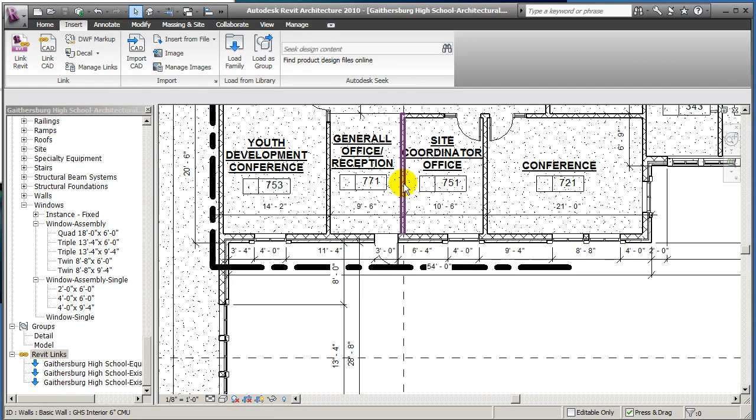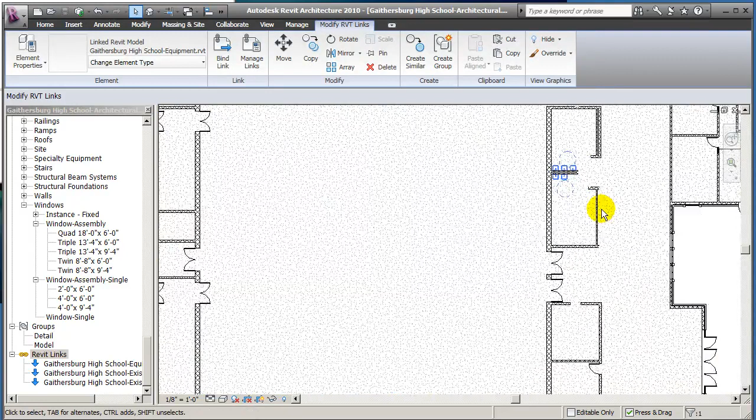Couple other things you should know about Revit links. Maybe little known tricks about Revit links is if you were desiring at this point to bring this Revit link of the furniture, the equipment, which you'll notice is this object right here. Okay, that's all the equipment that's in that freestanding file. I still need to make all the equipment that's in the architectural file.

I would really like to make it and put it into the equipment file, but it needs to be freestanding because right now it's wall mounted. So what a lot of people don't know is if you ever would desire to put this back into your file, it's as easy as right clicking on it. Oh, I'm sorry, it's at the top of the list. It's called bind link. And all I would have to do is hit bind link. I don't even need to bring the details.

And at that point, it's going to take that link. You'll notice you get this warning that says this file is approximately 10 meg or larger. That's basically warning you. That's why I made it into a Revit link, is because it was so large. I can answer yes to that, and you'll see it'll have to work pretty hard to do that, putting those objects into this file. Like I said, it's got to work hard.

I'll go ahead and I'll probably clip this part of the animation out if I get the opportunity. Oh, it's not too bad.

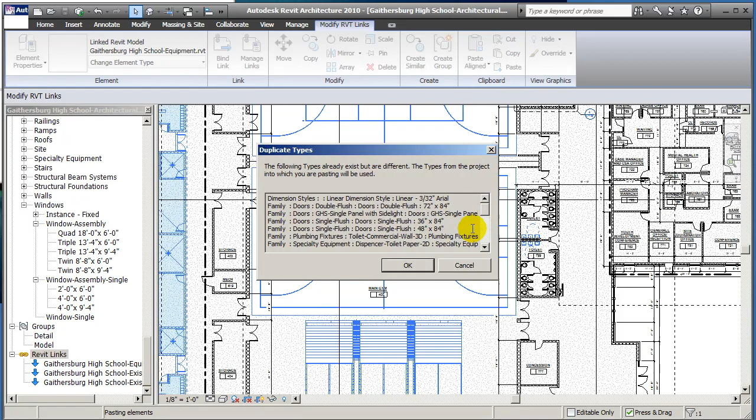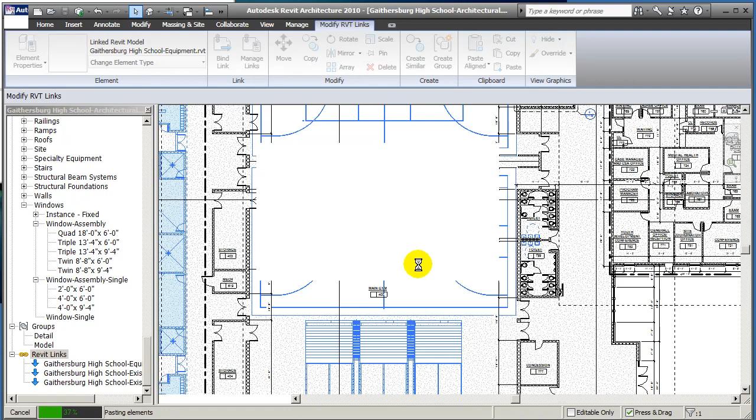It's going to give me a warning about matching materials and family names. It's not going to cause you any problem. We can go ahead and say okay to that. That warning is just letting you know it's going to use the materials that are in this file. Instead of, if you had updated the materials in the other file, you would have to clean those materials out of this file first before you did the bind. Hopefully you won't run into that issue.

I think my computer's a little bit mad at me. Don't panic. It does have to work pretty hard to do this, so just be patient. But when we're done, all of the furniture, all of the existing, whatever you would like, would then be in your file. Let's see, is it going to come back?

We're getting close now. Some of that equipment that you've used is very, very heavy and has a lot of extraneous data in it. Families add file size, whatever the size of that family is on the disk. So if you had a family that was 1 meg and you put that family into your file, even if you never used that family, it's going to add 1 meg file size approximately. There's a couple other things Revit does, but it's pretty close.

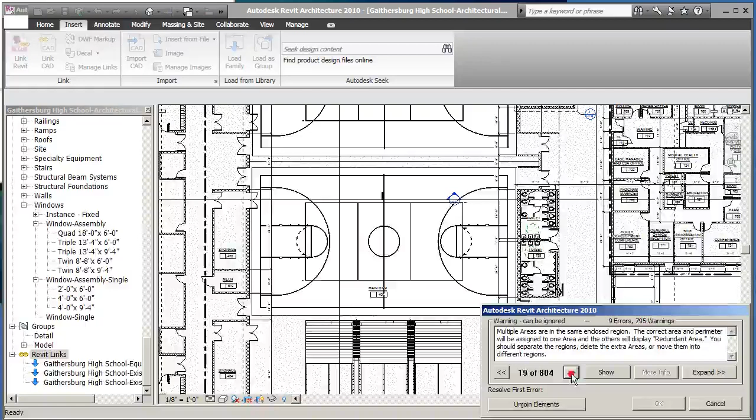Okay, so we will see a few error messages. This message that you're getting here is a lot of the lines that you've drawn, very small lines. It's having a problem joining them. It's telling me right now that there's multiple areas in a region, which you can browse through. You can also hit expand, and then you can go through this list of errors, redundant. You'll see it's a lot of highlighted lines.

The idea of drawing in lines, or worse yet, importing from AutoCAD, that's a bad idea and will cause you heartburn. This is part of the reason that I wanted to strip all of this information out of the file. If I would have tried to build this building with all these errors in the file, I would have been in big trouble. So that's part of the reason I split the file apart.

But I can just go ahead and solve the ones that I have to by hitting unjoin elements, because you'll notice the OK was not available. Once it unjoins all these lines, then we'll find that either it's going to be OK or it's going to go ahead straight into the file.

This is the big reason that I split these up. You have to really control your file if you're going to be doing a lot of orbiting and a lot of working on your 3D. And when I'm building the building, I have to really do a lot of flipping back and forth between the views. So I learned this the hard way.

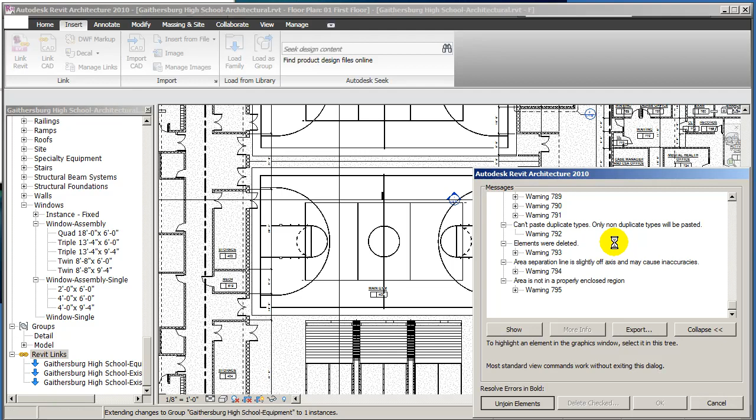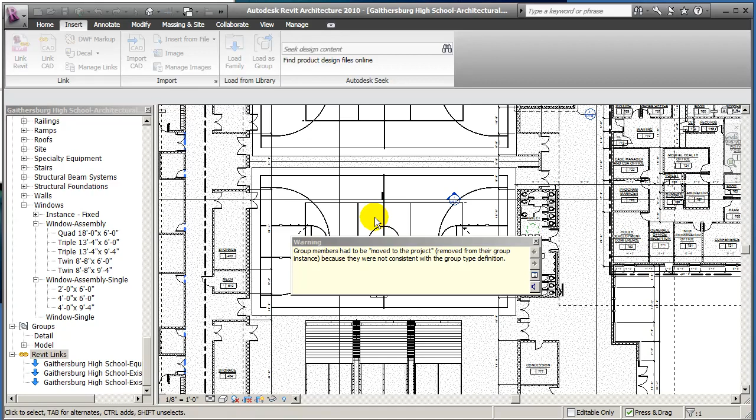There's a couple errors that are coming up about groups, because there was a group in that file that was the same. That's one of the biggest problems that I found in your file, is in that locker room, the array command really put a beating on someone. And what I mean by that was, I know there's a lot of lockers in this room. However, because of the array, there was actually 1,300 lockers in this room, because you had a lot of lockers on top of lockers because of how the grouping works.

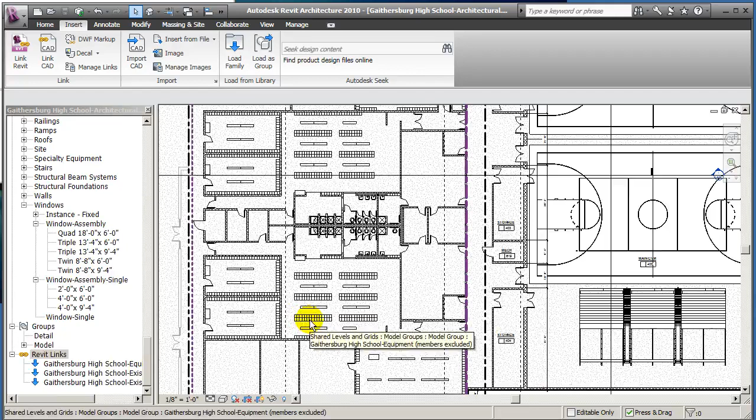So that might be something that we want to cover at a later date, just to let you know where the problem was. Now, if you go to families, you probably would place your families as a component, and then you would go in here and you would select your family that you wanted. You will find that there should now be one called a locker row.

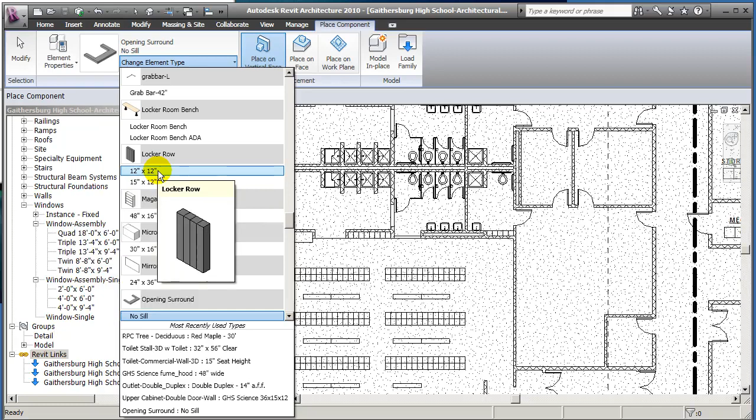Okay, so I wrote a hybrid family that basically allows you to, when you pick the locker row, you just simply draw a line where you want those lockers, and it'll put them in for you in a row. It's not an array. It can be flipped if you need to flip it to the other side. It can be re-stretched at a later date. It can be copied. We can even take the calculations from it.

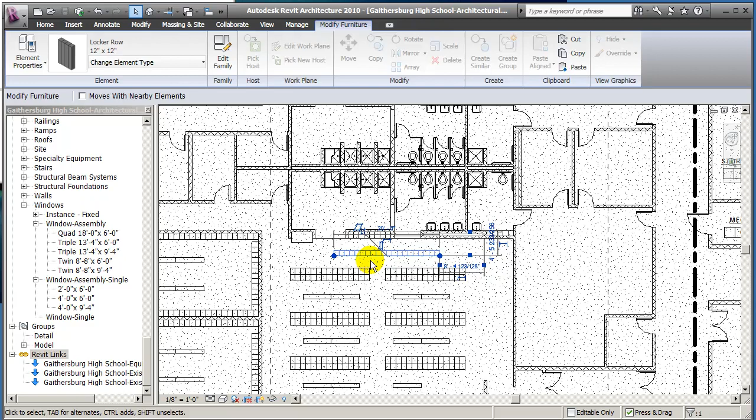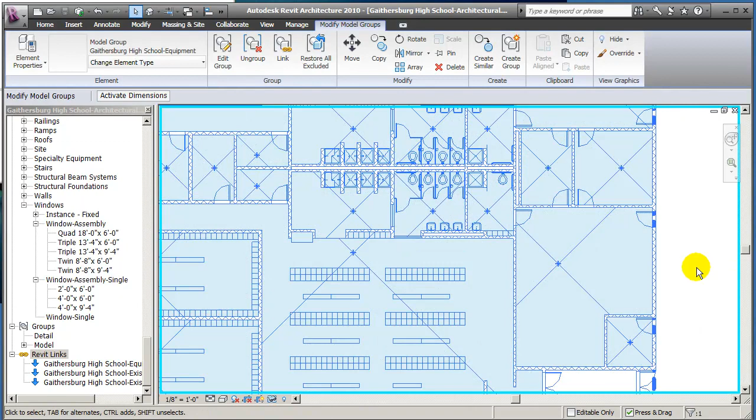Now, that Revit link that I just brought in, which was the existing equipment, you'll see that's it right there. You'll see what happened. I'm going to go ahead and use my isolate element to find out that what I've actually got is all of the equipment that just got merged in, all of your furniture and whatnot. Okay, when we bind it, it becomes a group. It is a model group.

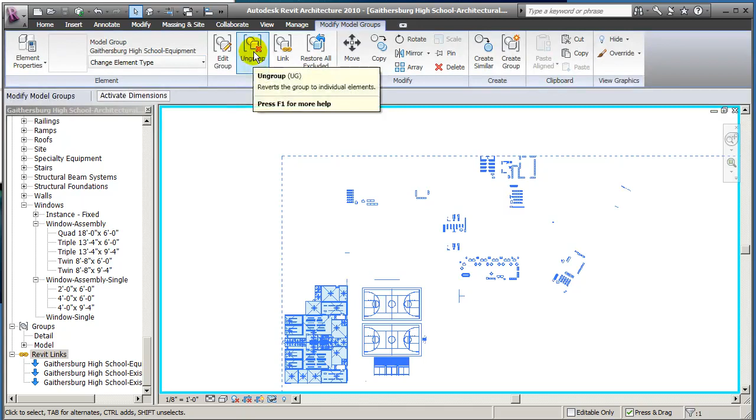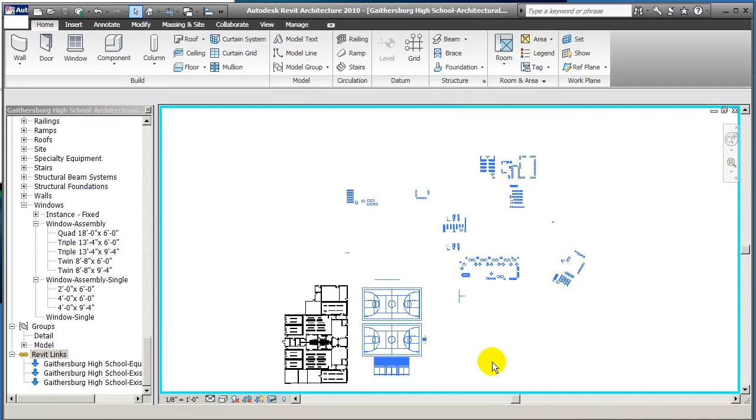So if you don't like it being a model group, you can then just ungroup all of that. And when you've ungrouped it and you've gone through these couple minutes of steps, your two files will once again be one. And like we covered with the first lesson, if you do save options, make this central, you should experience almost no difference. But as I said, the one thing that concerns me is that I had to move some equipment, and you may not want to use those files because I've coursed them.

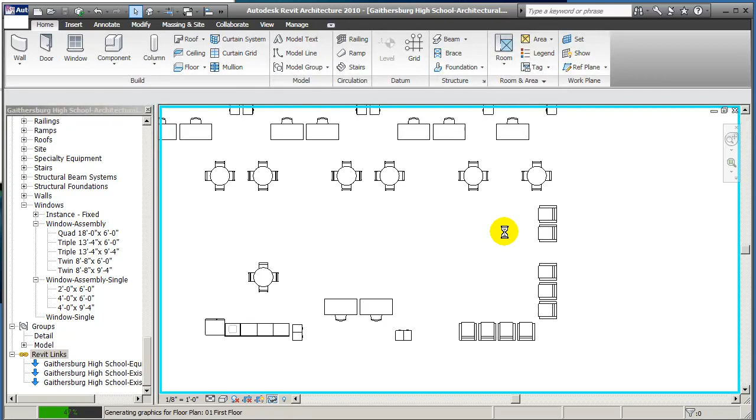But you can see I'm in here. If I turned everything back on, you would actually find that short of the design options, and that's what I'm running into with the design options, is I don't think it's very friendly with the Revit links. I know it caused the computer to crash out when I tried to do a project north rotate.

So I'm still going to investigate that further this week, but you would find that your furniture would be no different than it was on Friday if you just bind and then ungroup it. I don't recommend it, but you can feel free to do it.